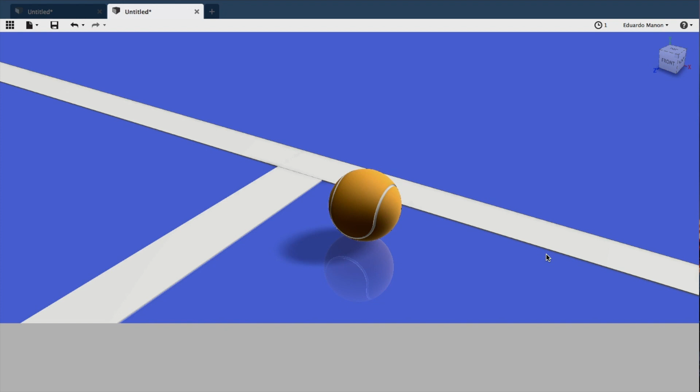So you can see right now it's kind of a little render I did with the actual lines of the court, just to make a little perspective. I actually made it with a glossy floor. We can move that with scene settings, reflections, and there we go.

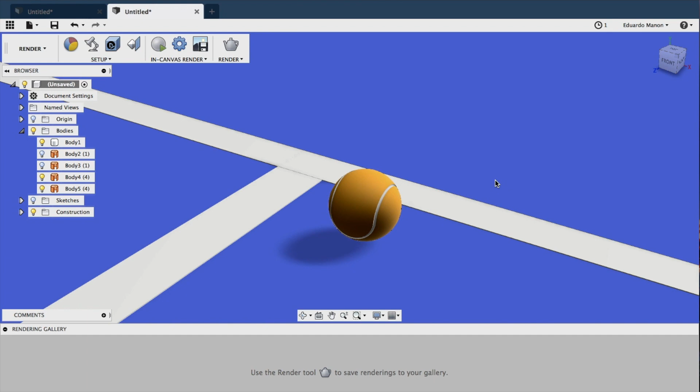We're gonna go ahead and start from zero so we can do it together. First of all, I'm going to go ahead and create a sphere.

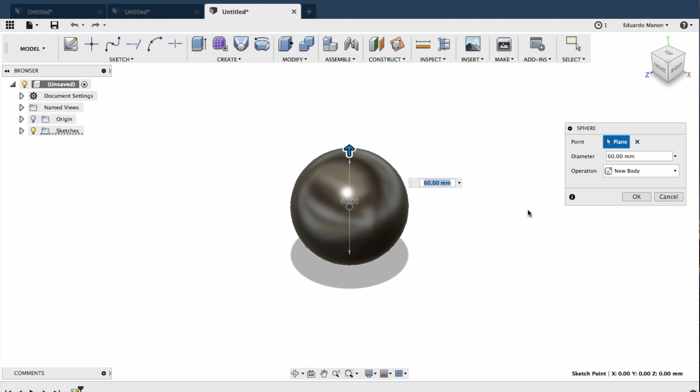Select any plane, select the center. I like to select always the center or the origin because it keeps things very symmetrical on all sides, so it's very useful. That's actually the distance I need for the sphere, the diameter. Go ahead and click OK.

After this, I'm going to go ahead and make a sketch on any plane. Any plane you select is a good plane. From this plane, you're going to go ahead and make a circle from the origin. Since we know that this one is 60, you can project it, but you don't actually need it. We're going to make it the size of the curve, or of the patch, the little piece of patch that is in it. It's about 45 millimeters. So there it is.

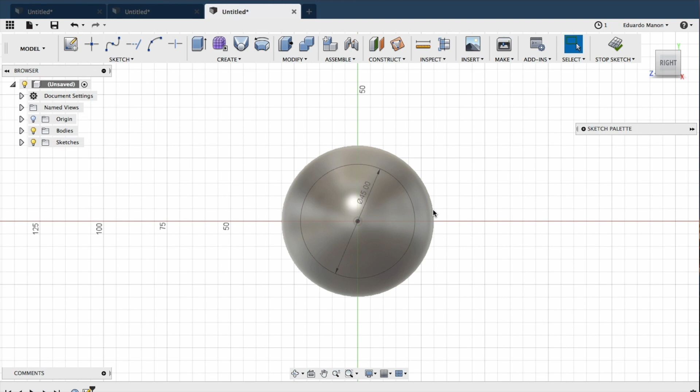From here, we're gonna go ahead and make a line from what I call one of the courts, and from here I'm gonna make another line. I'm trying to see if I can fish the reference line, but it won't, so I'm just gonna click OK. Do the same - start from the origin, so I know that I'm squared.

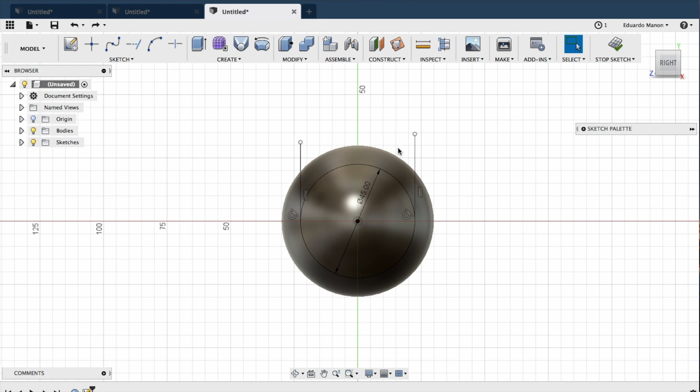I don't want that last line. From here, I'm actually going to have to project the figure so that it's well done. But actually, you don't even need that one. You're just going to go ahead and trim the top part, and it always gives some kind of warning that to avoid any mistakes in the future, you unconstrain something. For now, that's all we need from this sketch.

We're going to go ahead and make an intersection curve. Which curve do we want? We want this one. Sadly, we can only do this one at a time.

We seem to have an error message. I'm going to go ahead and try project to surface. The face is this face, and these are the curves I want. It says: not support projecting sketch geometry into same sketch. Please change the target sketch or geometry.

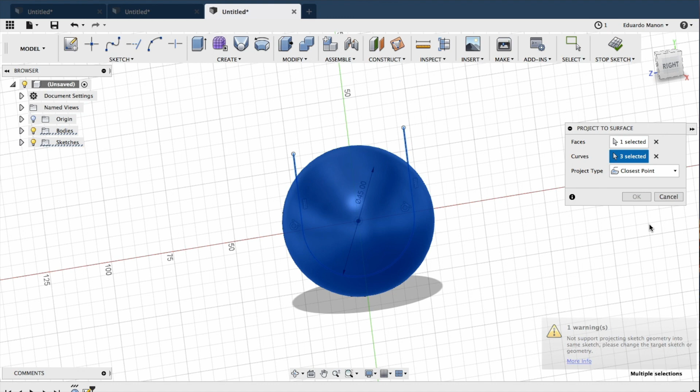Okay, so we're gonna have to stop the sketch and make another sketch because it's gonna be in a different plane. When you'll see right here, when we open the sketches, we only have one sketch because the sphere we made it from the create menu - we made it directly from here. So we don't have a sketch for that one, but we do have one for the patch we're gonna make. So let's just select any sketch.

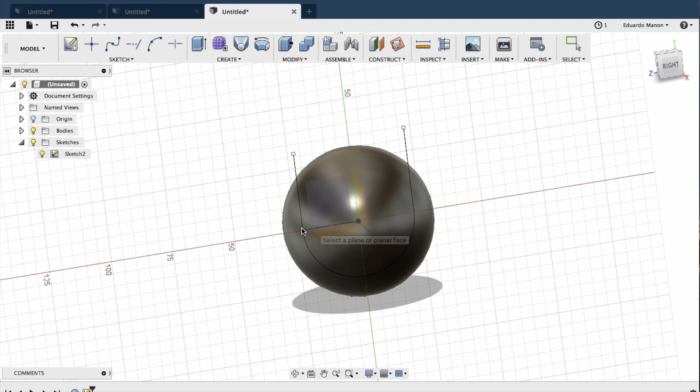It says we need a curve. We're gonna select this curve and this face, and that's pretty much what we need. We're gonna right click, repeat intersection curve, and select another curve and the same face, as this is where we're going. Repeat it once more. It doesn't allow doing several selections at once, that's why we had to repeat this step several times.

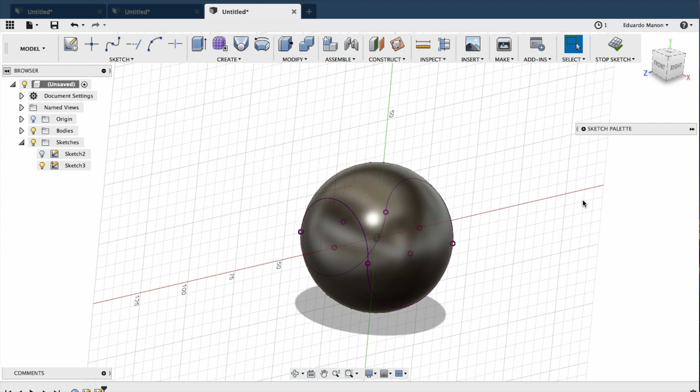But once you've finished, you can see that we have what we want. That's kind of what we want. From here, we're gonna go ahead and make that little dent that the balls have. And that's pretty much it.

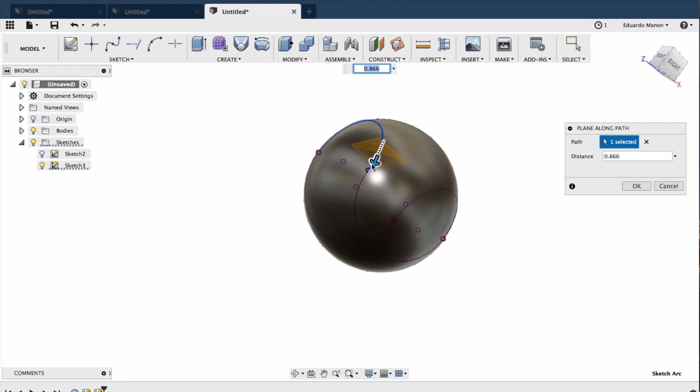From here, we're gonna go to construct planes, and we're gonna select plane along path. Select this path and go all the way to the top. It actually doesn't make a difference, but I like to keep things ordained - I'm not sure that's the right word, in order. From here, we're going to select this sketch and select the plane we just did.

We're going to make circle, C for circle.

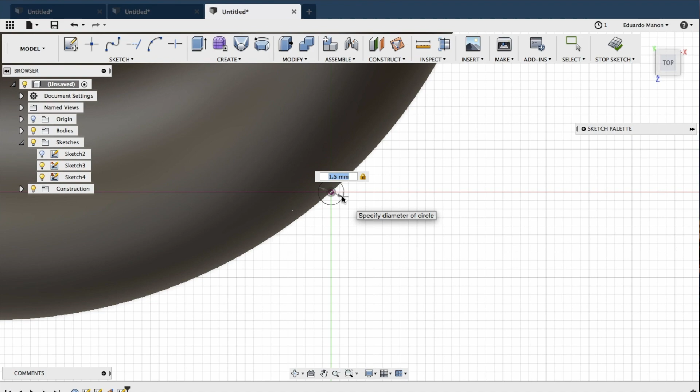When we're going to make a dent, about 1.5 millimeters is right. Double enter to lock it in place. As easy as it sounds, we stop that sketch because that's all we're going to do there.

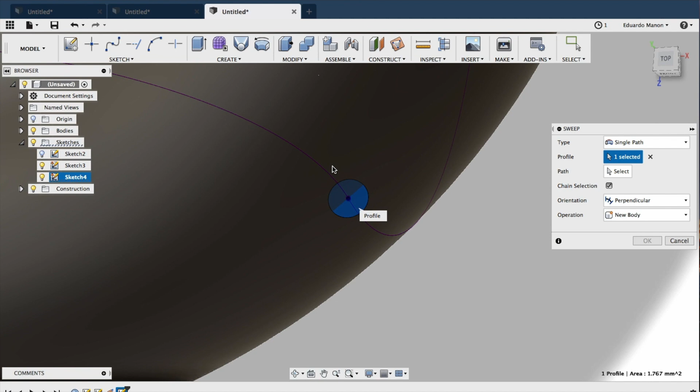We're going to use the create environment again and go with sweep. From sweep, we're going to select the profile I just did. It's a single path since I only have one rail, and that's all we need for this one. Once we select the profile, we're going to go ahead and select the path. Since it's not connected, since it's not the same line, we have to select all four, but since it is connected, it can go all the way around. We're going to go ahead and make cut.

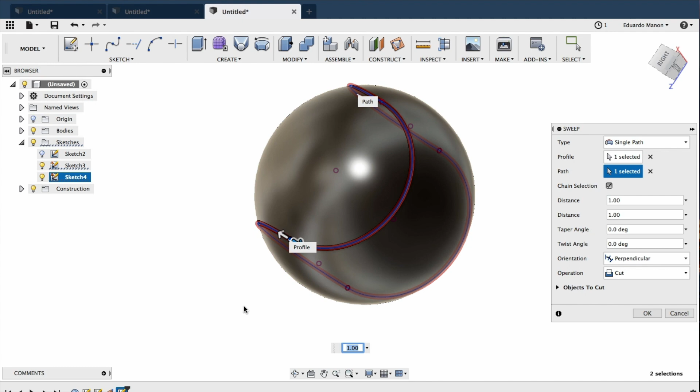We're going to select the option perpendicular because parallel would shift in the curves and it doesn't work for us. So we're going to select OK, cut, and as you may see, we already have what we kind of need. From here, we're just going to go ahead and go on home.

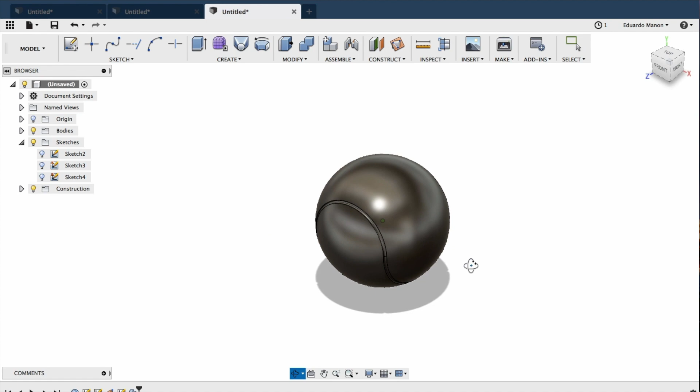We go for A, for appearance drop-down menu. I tried to download this, but apparently Fusion's having some sort of problem right now, and you cannot use it for the moment. So we're going to go ahead and make something that I already have, like plastic, opaque, textured. No, I love textured, but it's not downloaded. Opaque.

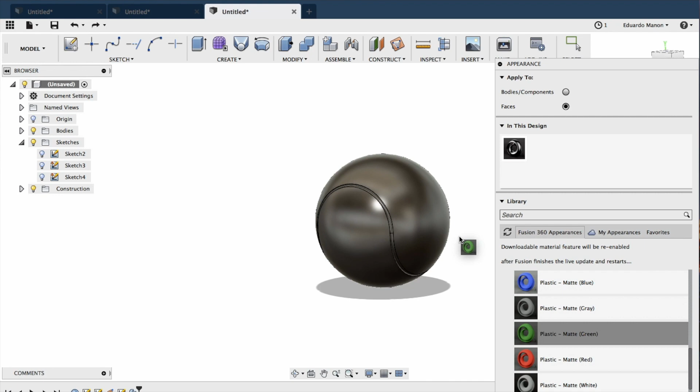For this ball, let's make it green. Oh no, but if I select it right now, it's going for bodies or components, and that's not the one I want. So I'm going to go for faces and select this face and this other face.

Why did I do this? Because these are not the same color, and I'm going to actually show that. We've used white, but I think I'm going to be using yellow. I think it's going to be more contrasting.

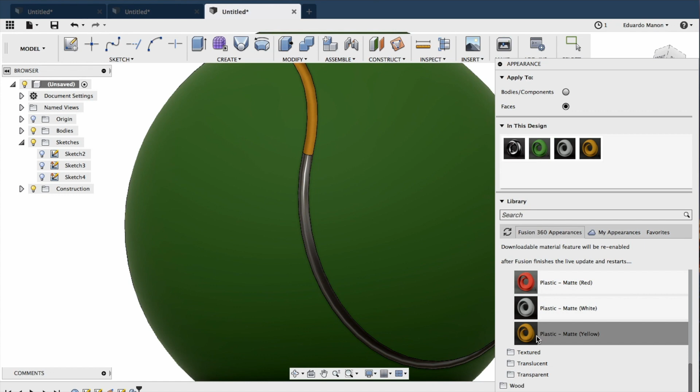That way we select it. It doesn't let me. Zoom in, select the face, and we only have one last face remaining. Same problem, it doesn't let me select it. There we go.

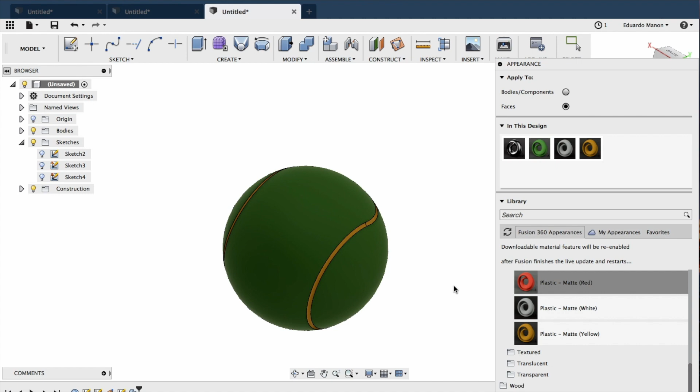You can obviously choose any color. Any color is okay. For example, I'm going to make this one red, or yellow glossy. Oh no, that doesn't make any contrast. Let's go with green opaque. That's pretty much it for this ball.

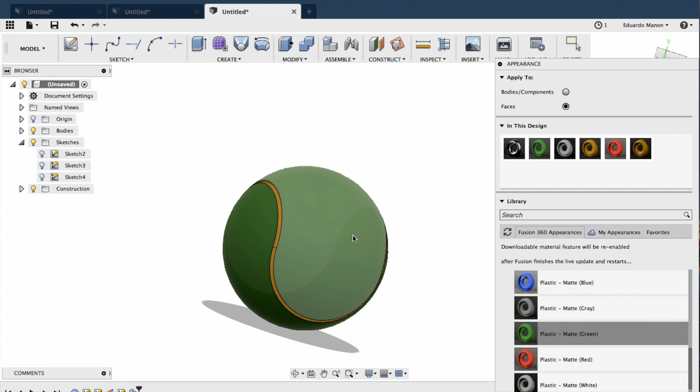I'm going to go ahead and hit escape. Let's get out of the appearance menu. Then we go to home, and in case you want to render it, go ahead and model, render. You could use scene settings, and from here you can check what you want to do with it.

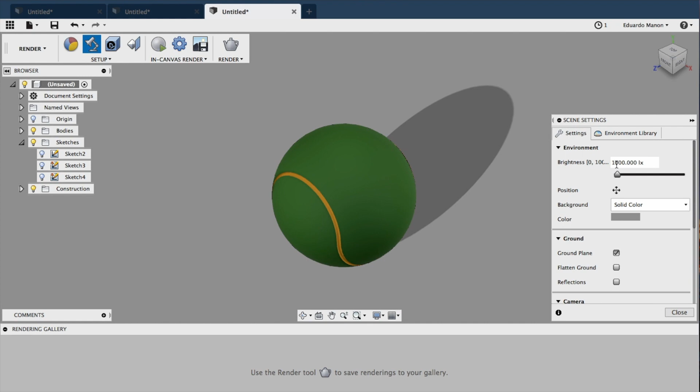I'm going to go with the easiest one right now to avoid overheating my computer. I'm going to go with cool light, it's my environment light. 1000 luxes seems about right. I like to move the light to some perspective that's not the automatic one. I don't know why.

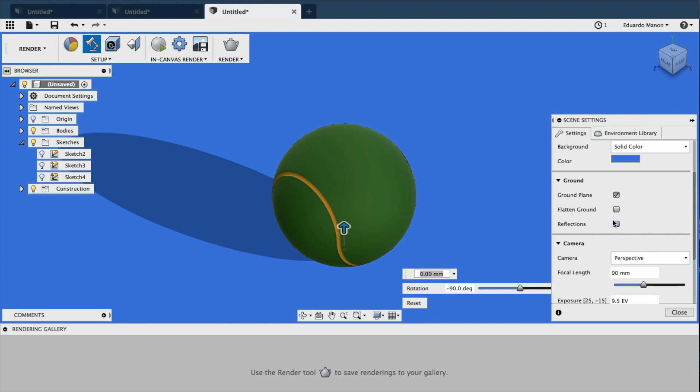I'm going to unselect ground, ground plane, so we can see a shadow being reflected. Solid color, we can use a red one, or the last one I choose, since most tournaments already use the blue one. Go ahead with blue one, and that's about it. We can do more things with reflections and all, but it's not that necessary for now.

Make an in-canvas render, and since this part takes a lot of time, I'm not going to bother you with the details. I'm just going to cut it to the end.